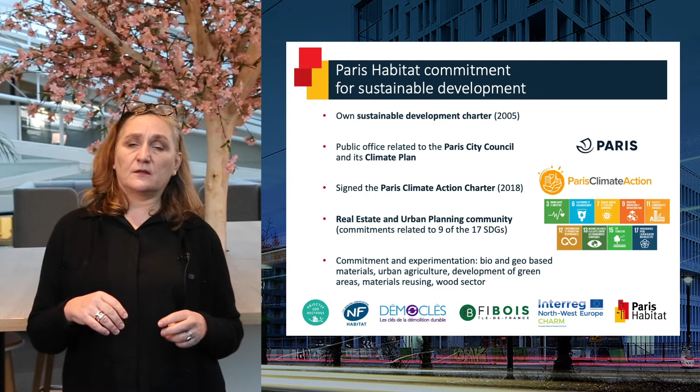To manage this challenge and to include Paris Habitat heritage in a post-carbon city, we need to adapt the requirements to the different types of buildings and be innovative in the way of building. We need to use low-carbon materials, such as bio-sourced materials, reuse components, and improve grey energy. We have to exploit local energy resources, such as geothermal energy, solar panels, and transformation of heat sources from industrial production, etc. I will talk later on.

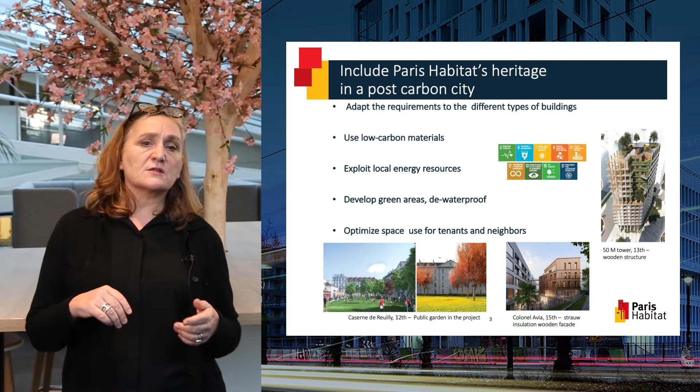We have to develop green areas, de-waterproof the soils, and optimize space use for tenants and neighbors, such as sharing green areas and adapting spaces to the needs of the tenants. But doing so, we also have to take into account the diversity of heritage from the beginning of the 20th century to our days, and take care of the fragility of our tenants.

Our investments go from global renovation to punctual actions. For example, the HBM buildings in red brick, which are totally obsolete in terms of habitability but with intrinsic values, need heavy renovation in empty dwellings with thermal and acoustic insulation, ventilation improvement, plumbing, reorganization of dwellings, and site projects with tenants. While the post-Second World War buildings, whose main issues are thermal and acoustic insulation and summer thermal comfort, with the challenge of asbestos, point out a real obsolescence and ask the question of their demolition.

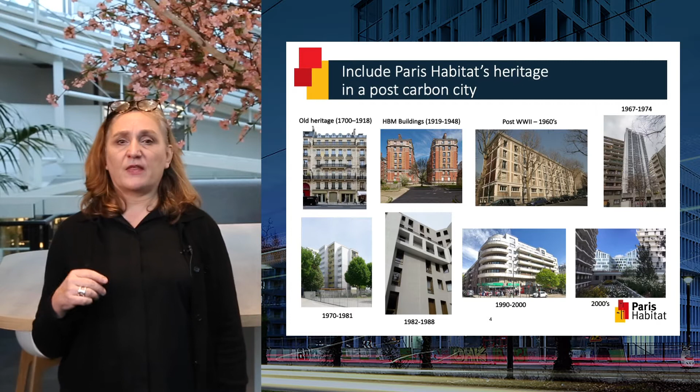The 1960s and 1970s buildings are large urban complexes made of prefabricated panels. Their main challenges are thermal improvement winter and summer, greening terrace roofs, and asbestos, but also how to improve attractiveness and service quality, demineralize external surfaces, and improve rainwater management and collection. The last 20 years of housing development already meet sustainable development and energy efficiency standards.

So only sustainable maintenance is needed to maintain the quality of the dwellings. In terms of energy efficiency, the energy consumption of Paris Habitat's housing stock—we're talking about 125,000 dwellings—is, as you can see on the schedule: half of the groups are labeled ABC, and the other half is label D, but closer to C. That is not so much.

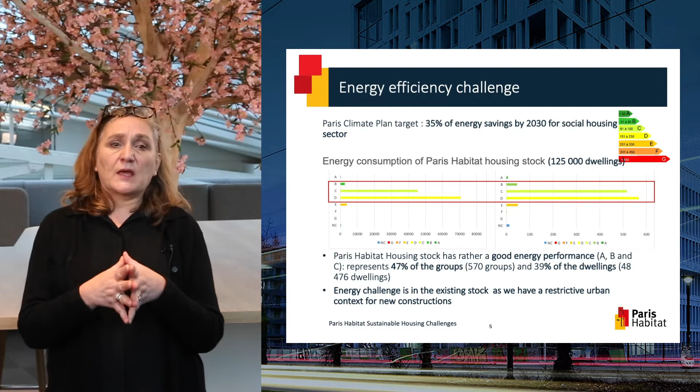However, the energy challenge is in the existing stock, as we have a restrictive urban context for new constructions, and as we have a diverse ancient heritage mostly built before 1948.

What kind of actions? Based on the SDGs, our actions tend to integrate climate plan goals into Paris Habitat's energy policy, and our goals for 2030 are to reduce consumption by 35% with bioclimatic designs and commissioning actions, reduce carbon footprint by 40% by developing thermal renovation, and by giving a second life to buildings as an alternative to demolition. And of course, we need to increase renewable energy.

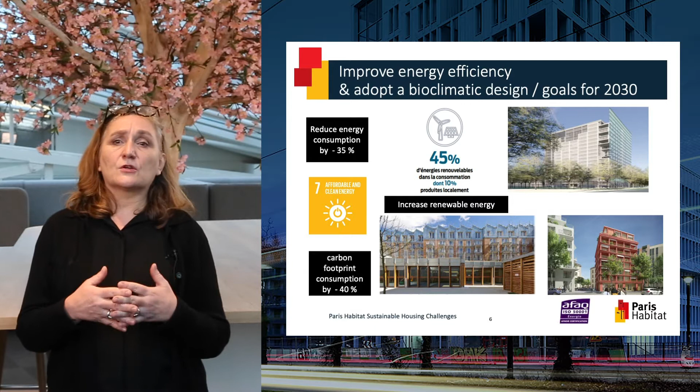To develop low carbon, we work on the resilience of buildings and fresh areas, adaptation and mitigation to climate change. We work on summer comfort, which is right now a real concern for our tenants. We work on the reversibility and flexibility of the building at the conception stage, and try to optimize rainwater management by maximizing permeable surfaces, as you can see on the pictures.

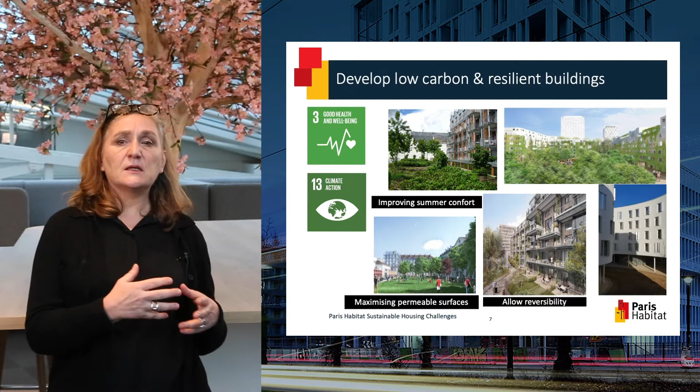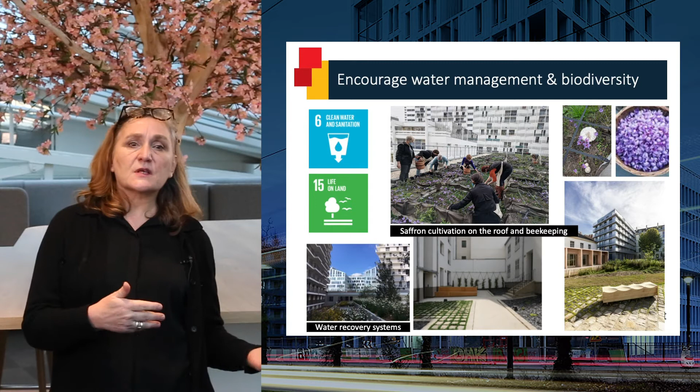To encourage water management and biodiversity, we try to demineralize and develop green areas. You can see here, for example, grassed paving in the gardens. We also develop urban agriculture projects on buildings, on the roofs, on the walls. Here, for example, you can see a saffron cultivation, and with beekeeping, we developed shared gardens for tenants. Our gardeners have an ecological management of the gardens with water recovery systems, choice of resilient plants, and no pesticides.

At last, we try to encourage local and low-carbon sectors, such as bio-based materials, wood and hemp, for example, that you can see on the pictures, but also cork or wood wool for thermal insulation, especially

inside the dwellings. No more demolition, but second life for the structure and the materials. We try to improve grey energy by the choice of materials.

We limit the need to excavate the land and develop it as close as possible to the operation according to the quality of the land. And we maximize the use of materials that are little or not transformed, or biosourced, or derived from reuse or recycling and coming from local sources.

We adopt construction methods that minimize the use of water in dry periods.

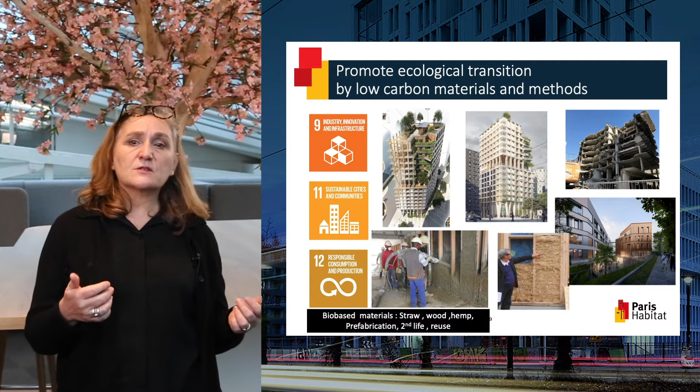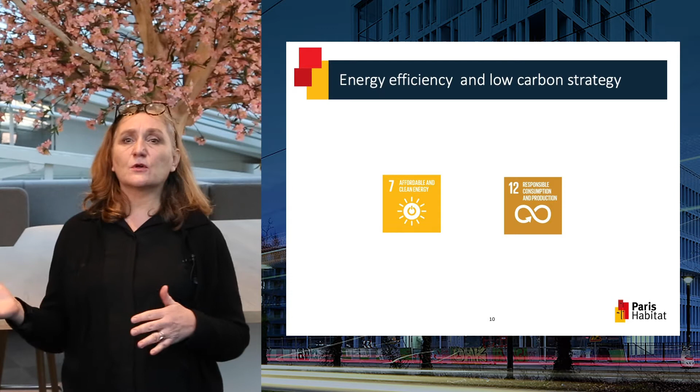To illustrate some of those commitments and actions, I will give the voice to my colleagues, Geneviève and Juliette, who will focus on two innovative projects in accordance with two of the SDGs: affordable and clean energy, and responsible consumption and production. Thank you so much for your attention.

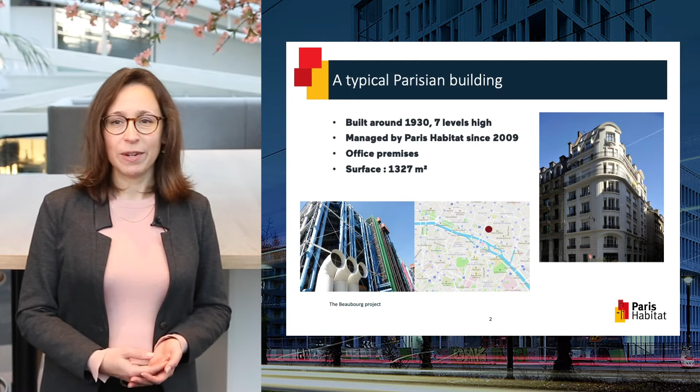So an extensive renovation was carried out for this building in order to transform it into 20 flats and a shop on the ground floor.

As you can see, we went back to the bare structure. One photo shows the floor open before it's been replaced, and the facade all opened up before the windows were put back. This work was an opportunity to improve the energy efficiency of the building in order to reduce

the heating need. Thus, walls and roof were insulated, all the windows were replaced, a new ventilation system was installed, and the space heating and hot water production was renovated.

And once we reduced the heating need, it's important to go further and try to use some renewable energy.

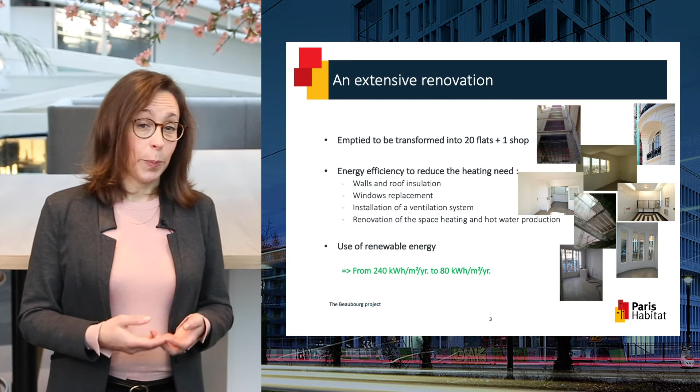So that was the aim for this project. Altogether, the energy consumption is reduced from 240 kWh per square meter per year to 80 kWh per square meter per year. So which renewable energy was used in this building?

When my colleagues in charge of the project went to visit the building early on, they discovered that an underground staircase directly connects the building to the tube tunnel, as you can see on the cross section.

The photo also shows that at the bottom of the stairs there is a door, and the door leads to the tube track. So the tube is going past just behind this door.

The temperature of the air in this tube tunnel was also measured, and we discovered that it was 10 degrees above the exterior temperature, which is a great source of energy.

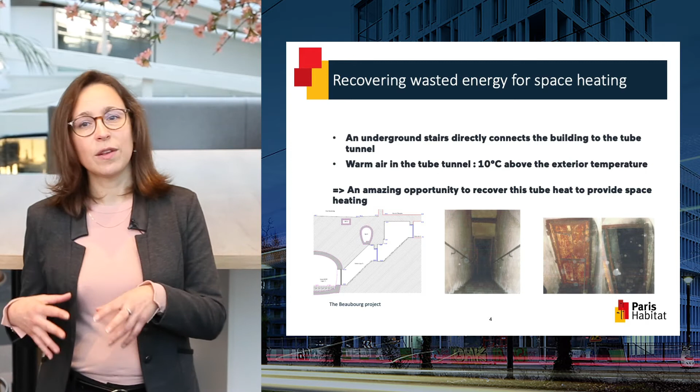So this project was an amazing opportunity to recover the tube heat in order to provide space heating for the building. To set up this innovative project, it was necessary to sign a partnership between Paris Habitat and the RATP.

The RATP is a company in charge of the exploitation of public transport in Paris and around. So the objective of this partnership was to allow Paris Habitat to extract the air from the tube tunnel.

Also, some studies were performed in order to assess the technical and economic feasibility of the project, for example, to assess the access to the tube tunnel and to measure the temperature and the dust content of the air.

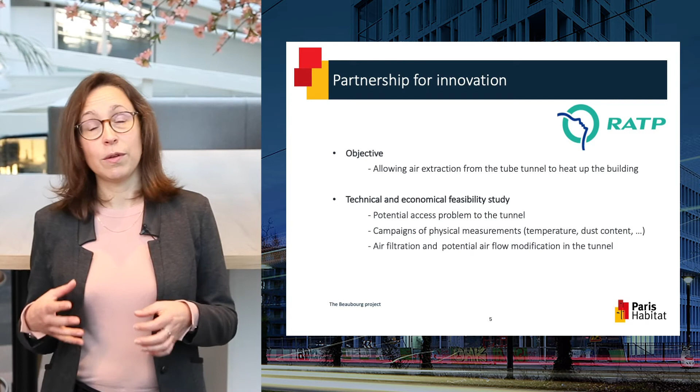To select an air filtration system, because the dust content in the tube is quite high, and also to evaluate the airflow modification in the tunnel when the tube goes past, because it could create an overpressure.

So the technical solution selected is an air-to-water heat pump. As you can see on the drawing below, the air from the tube is sucked up into the heat pump unit,

which produces some hot water, which is then distributed to the building in order to produce space heating.

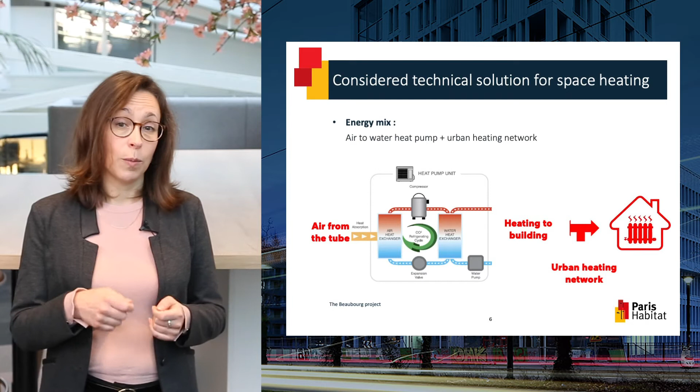So this source of energy is not sufficient in order to produce all the heat for the building, so the additional energy comes from the Parisian urban heating network.

So the investment for this heat pump and the air filtration system was about 70,000 euros. And we have to notice that for this experimental project, there was no fee charged to Paris Habitat to recover the air from the tube.

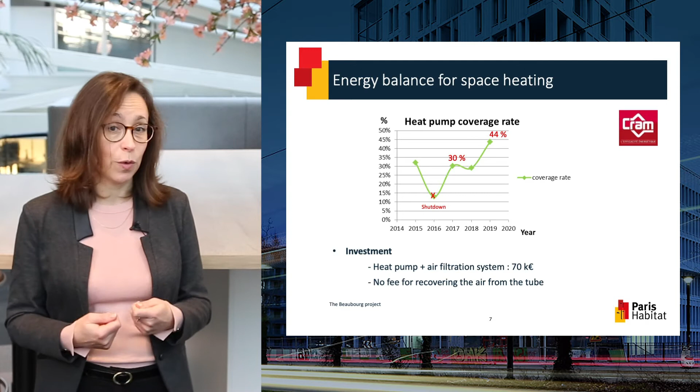So what's the future? Several cities are currently trying to find more opportunities in order to recover the heat from the tube. In Paris, for example, with the extensions of some existing lines and also the creation of some new lines. In Nantes also, in France.

In London and in Madrid. Madrid is also trying to recover some heat from the tube when it brakes. So in the future, we hope to see more similar projects.

Today, I will talk to you about circularity in our housing operations and more specifically on materials reusing.

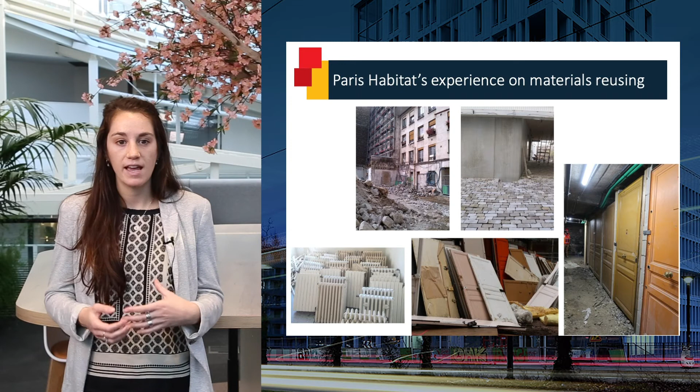Paris Habitat has been experimenting material reusing on different operations. Materials such as wooden doors, cobblestones, or radiators have been refurbished and reused on a few sites, as you can see on the pictures. On the Caserne de Reuilly

operation, we've been experimenting material reusing at a larger scale. In these operations, we have about 39,000 square meters of renovation and new building, so we have family, specific dwellings, commercial premises, and nursery.

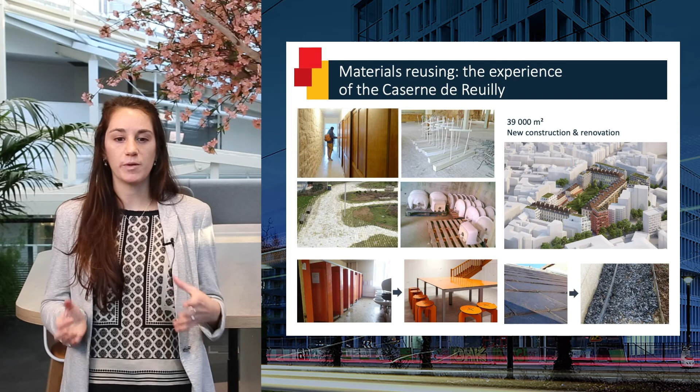We reuse different types of materials: cobblestone, radiators, luminaires, slates that have been crushed for pathways, but also panels transformed to make furniture for student dwellings, and wooden cupboards reused on sites. All these reused materials make this operation an emblematic site in terms of circularity.

At Paris Habitat, our goal is to integrate a circular methodology in our asset management and increase the part of reused materials in our operations.

In this framework, we joined a European project on circularity and material reusing. CHARM project means Circular Housing Asset Renovation Management. It's a project from the Interreg Northwest Europe program, financed by the European Regional Development Fund since 2018 and until 2022.

It's a project led by University of Delft in Holland, and it gathers 4 social housing companies, including Paris Habitat. So we have partners from England, Holland, Belgium, and France, and other partners on research and communication, such as the European Federation for Living, but also associated partners that have a key role in dissemination and feedback.

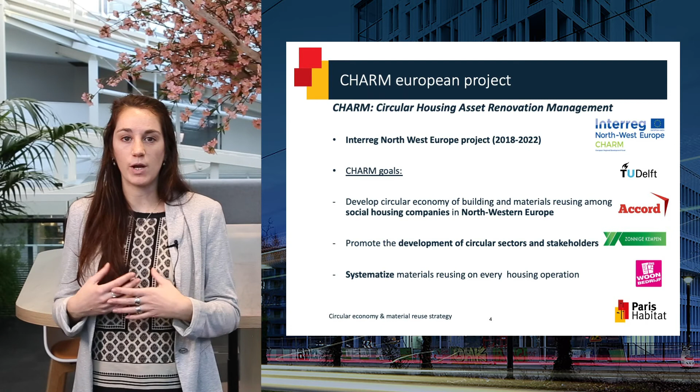The goal of the project is to develop the circular economy of buildings and materials reusing among social housing in Northwestern Europe. We want to promote the development of circular sectors and stakeholders that are currently emerging, and we also want to systematize materials reusing on every housing operation.

In this framework, Paris Habitat, as a partner, has different missions. We want to experiment materials reusing on demonstration sites, from renovation to new construction. We also want to experiment material reusing on refurbishment of dwellings before rental, and the goal is also to structure a circular strategy on material reusing.

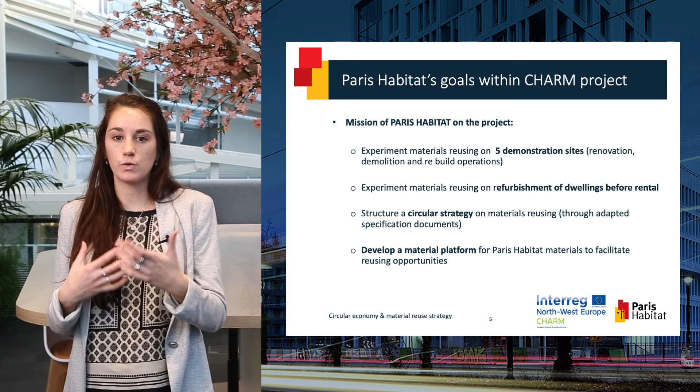This is through specification documents adapted to circularity. We also want to develop a material exchange platform for Paris Habitat to facilitate reusing opportunities.

About the development of the platform: Paris Habitat already has an internal material exchange platform called Ecosystème. It was created in 2016 to exchange materials among Paris Habitat's different operations, but it's not really used anymore for a few practical reasons. Within the CHARM project, the goal is to develop the accessibility and functionalities to create a new platform, more ergonomic and with more functionalities.

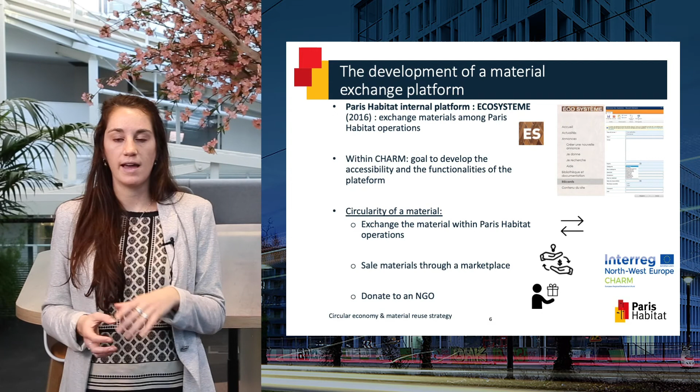How it will work: to start on the platform, we explore the possibility to exchange the material within Paris Habitat operations. If it's not possible, we send the material to a marketplace who's going to sell it. If there is no interested buyer, we donate the material to an NGO or to a foundation of our network which has a social impact.

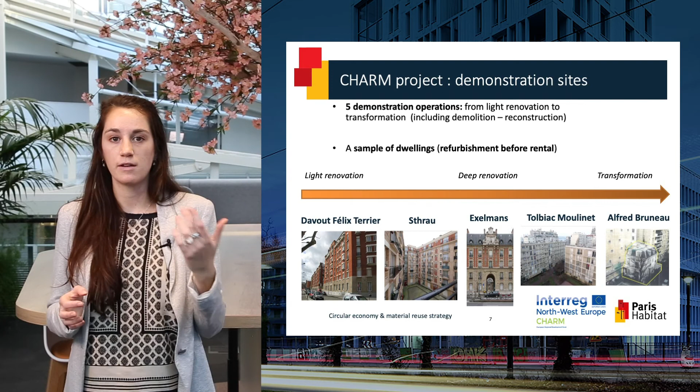Another mission within the CHARM project is to experiment material reusing on a few demonstration sites. So we chose within Paris Habitat's housing stock different types of buildings, such as buildings from the beginning of the 20th century, typical worker buildings, and buildings from the 60s.

We have 5 operations, from light renovation to deep renovation, which involve demolition and new construction, and also transformation operations. We also have a sample of dwellings that we refurbish before rental, after a tenant's departure. The goal is to have a representative panel of our housing stock and operations to experiment material reusing at different scales and develop a methodology in order to systematize material reusing in every operation.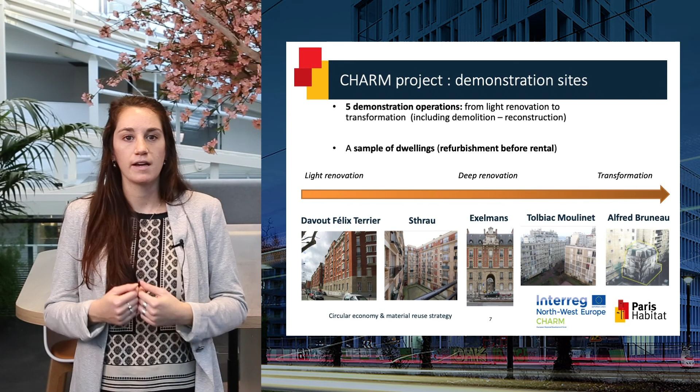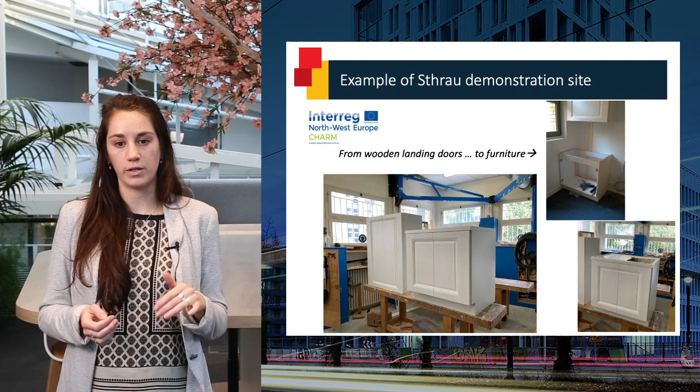On the picture, you can see the progress of one of our demonstration sites called Sthrau. On this site, we've been reusing wooden landing doors to make kitchen furniture: one is for the sink, and the other one is to hide the water boiler. The doors have been taken from the site itself.

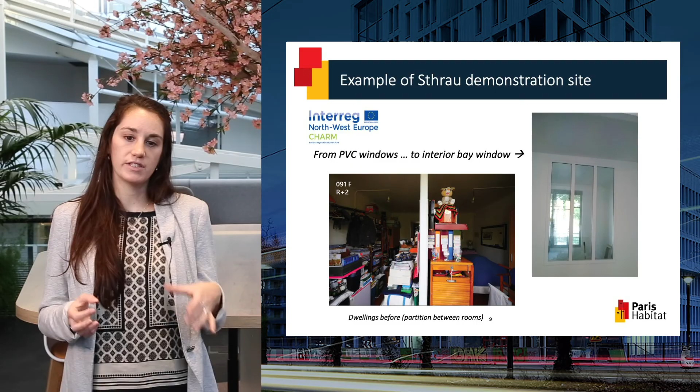On the same site, we have been reusing PVC windows to make a glass partition wall. This is what we're doing on one of our sites, reusing and transforming, but we also experiment with reusing, refurbishing on site, and sending material to be reused on other sites. Thank you for your attention.